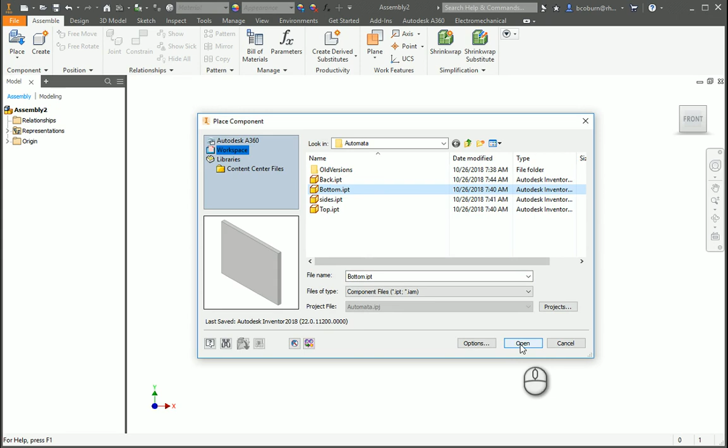Click open, right click, place grounded at origin. This makes my front view, and I don't like that, so I'm going to move it here and make that my front. Then click in the corner of the view cube and make this my view. I'll do fit to view, and now we're ready to go.

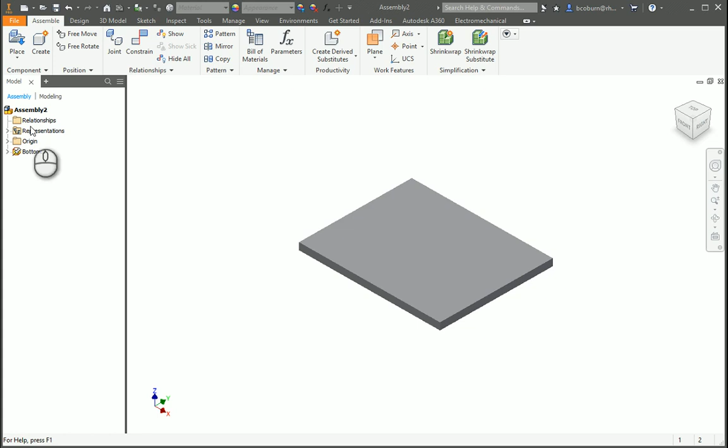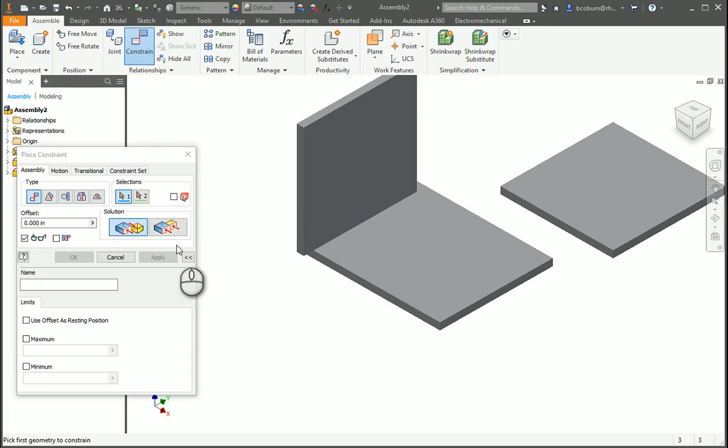Now I'm ready to place the sides. I'll get the sides, hit escape, and I've got my two sides. You want to make sure you got them the right direction so everything fits fine. I'll hit constrain, and I want this mated with this part right here, apply. Then I'm going to flush this with the front, apply. Then rotate around, flush and flush, apply.

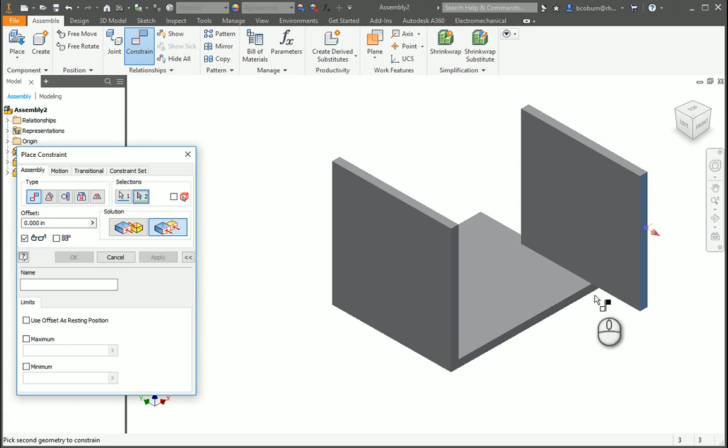I'm going to do the same thing with the other side, starting off with mate again. I could have done that by mating edges, but typically I start off my students using just flushes to get them oriented with how to do this. Apply, and I need to go around on the side—it's close, but not quite flush. Apply, zoom out, and now I have that part of my box done.

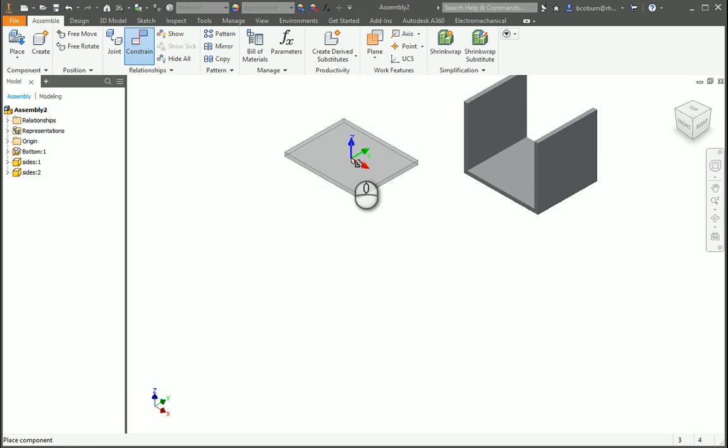Now I'm going to go ahead and place the top. It comes in, hit escape, click OK, constrain. I want that to fit right on top of that, apply. So it's mated, now I'm going to flush again.

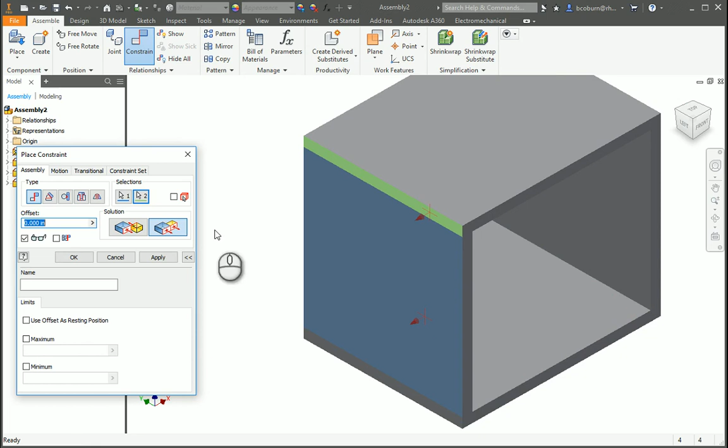So this is a fairly easy assembly for a beginner. There's no complicated parts, and everything goes together fairly well. Apply, and then I'm going to go around and click on this.

Now when I go to place my back, I'll make sure I put it on what is the back of my box, so I'll put it back here. Then I'm going to hit escape, and we're going to go around to the back. Now we want to put this right on the back, so let's see how that fits. I definitely want to constrain it.

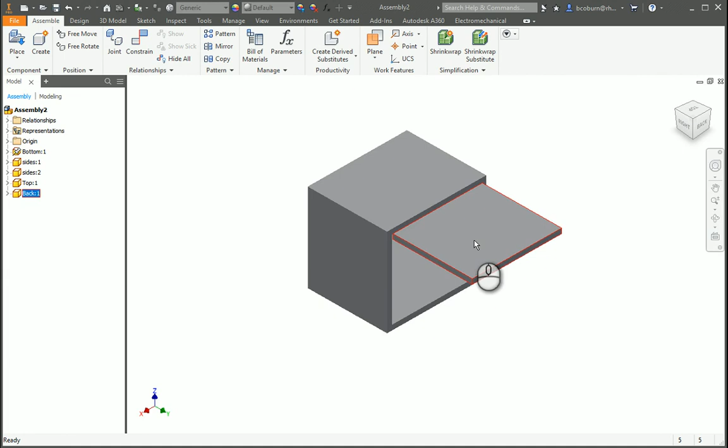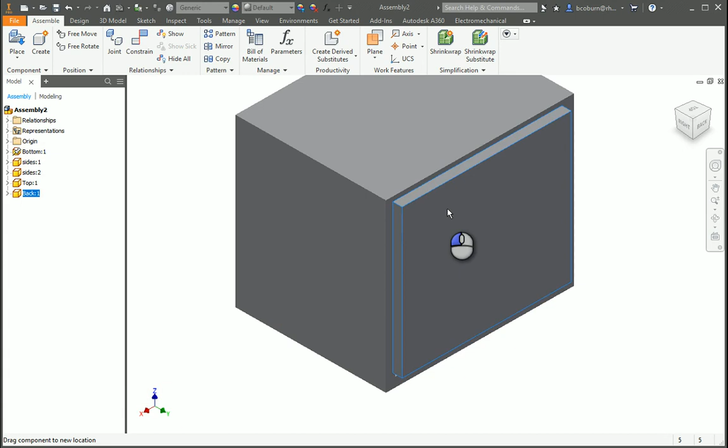This is where students will get confused, and I'll make some of the same mistakes the students will. They will want to try to do this, apply, cancel. Then they come in here, and you notice where the problem's going to be—they're not going to realize that this wants to fit inside there. So the easiest thing to do is delete that mate.

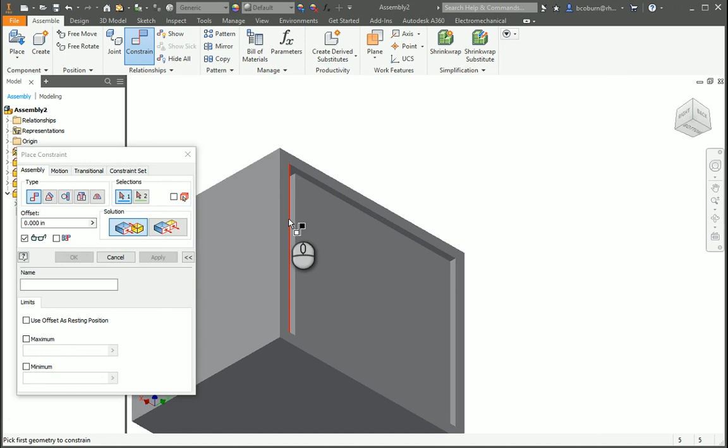Now what I'm going to do is constrain. This is going to be mated with the top part of that, apply. And maybe I want this edge with that edge, apply. Let's see if that works.

So it's the swinging door. Now I need to constrain that side to that, apply, and now I have my box completely put together and ready to go. So that shows you how to assemble your box.